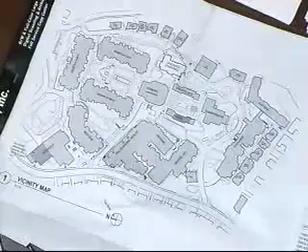So staff had asked, what will become of Building D? What's going in there? We provided a list of the various uses that will be moved into Building D—sort of playing musical uses here. In the end, staff said, if you're going to be modifying the interior of Building D, we'd like to know right now how that's going to go. We think Building D, once renovated, will require its own amendment to the existing conditional use permit, so why not seek those two approvals simultaneously? After discussing that with our client, we decided that was a pretty good idea.

So Mr. Kilburn went back to the drawing board and did the work necessary to bring Building D forward to you for conceptual review, so it'll essentially catch up in the process with the Life Center. At the same time, he worked on some planning and other departmental requests related to the design of the project, which he can discuss with you, and he also worked on responding to the concerns raised at your October 4th meeting. So we're coming back with revisions driven in part by the need to get Building D in front of you before we can go to the Planning Commission, but also, since we're here, taking the opportunity to address the concerns raised previously. Thank you.

You're on—that was a great prologue, I guess. Would you like to start with Building D, since that's kind of the new project? What sheet do you think? Let's see. Cool. What's 5-1 down here, or 5-4?

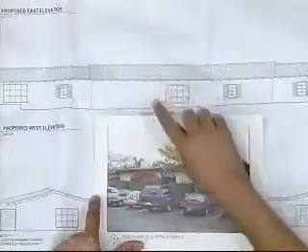And actually, you have 2 chimneys that are not shown in elevation. That's a minor observation - we're not changing those.

I also brought some modeling of it if you wanted to see it. I don't think we need to see it - if we have any questions, we'll come back to this.

So that's all you're doing to Building D? That's correct. Good, let's go over the main Life Center building.

I'm not sure where best to look at the changes, but maybe a combination of the building elevations and the renderings, and also the plaza plan in the front, the entry approaching the building. Yeah, we could look at that first.

I think it's a good place to start that covers several of the comments from our last meeting. At the entry, the lower entry, we had more of a rigid, stepped plan view of the entry walkway. On the upper entry, we had more of this organic, flowing landscape feel that played off of an existing oak tree and the existing fountain.

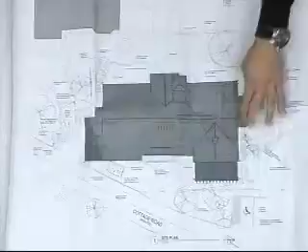A couple other minor changes that I'm not sure affect the exterior, but we had to move some walls around in the mechanical area to protect some trees. Essentially, that's the lower entry change.

The upper area, we were also asked to take a look at perhaps some architectural changes that would help soften the plaza area. What we've done is take a closer look at this. We had a nice curving stair that comes up into the building, which we really like and think leads people into the main entry. But we also had kind of a sea of pavers that felt maybe a little too harsh, so we've added larger landscape areas to break up the space and also lead into the building.

On this side, we had a wall which we've now turned into a seat wall that we think is a nice benefit, allowing residents to sit here and interact with this plaza where we're going to have an open dining area. Okay, now how about we look at the elevations?

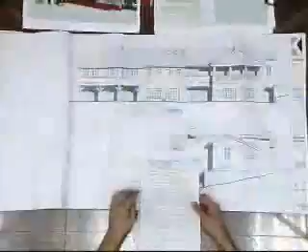East elevation, we had two comments having to do with the detailing here and there. We took a look at your suggestions and felt they were well taken, things we needed to look at anyway as we progressed. One question was to take a look at the width and size of the columns, and make sure the proportions felt right.

We looked at that more carefully and actually widened the columns so they have a larger mass. We were also asked to look at how far out the building cantilevers and how far recessed the doors are, and we decided we needed to pull them forward. So we moved the lower level plan toward us on this elevation by about 1.5 feet, and increased the size of the columns from 18 inches square before to 2 feet, which has a nicer proportion now.

Secondly, on the east side, we were asked to simplify the ornate handrails, look at the lights on each column, and elaborate the trellis. We looked at this carefully too, and the only thing we did was remove the lights on the columns. They seemed a little unnecessary, particularly on the outside of the column, which we really don't need.

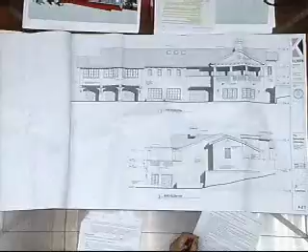But other than that, we felt this area is where we really want to celebrate the space, since this is where the residents are going to spend a lot of time. We want them to have the feel that it's a handcrafted space, with detail and ornamentation for them to touch and feel. I think if you look at the renderings, just removing the lights did a lot, and we want to celebrate the detail at this one location. Okay, let's move on to the other elevation.

Now this area, the main upper level entry - as you'll recall, we had a larger gable and an archway offset from the main doors, with a chimney element for the elevator penthouse. We went back and looked at this and felt that making a more symmetrical entry seemed to make a lot of sense.

So what we did was incorporate the entry into its own architectural element. We raised the ceiling height, added glass around the doors and a transom light, and turned the elevator tower into an actual little tower element. So it is asymmetrical overall, but we feel it's balanced with the entryway being symmetrical.

And then the mechanical well - what kind of changes happened there? After making all those other changes, which we felt were the most architecturally important - the main entries, the areas people are really going to see - we came back to this element and tried several different things, including pulling it out and trying to turn it into part of the building as was suggested.

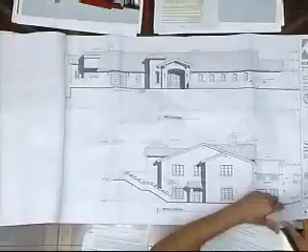One last thing, we were asked to take a look at this element here. Previously it was only seen on the model. There wasn't much change, but we wanted to emphasize the design will be a wood beam sitting on top of this column with open rafter tails on top of it. So that's changed. Let me see if there are any others - these are sections, reflected ceiling plan, okay.

Let's move on to the landscape site area. I want to maybe quickly go through the model since these are your 3D images - we'll just let you study them for a second. I think you could just take a look at them on your own. I did bring some larger ones if you want to pass them around, if that's easier.

So your landscape plan. Yeah, the replanting. The only changes we've made here are just added planting areas within the plaza and at the entry. Just some small areas that would soften this and direct the residents into the entryway. I didn't take a hard look at what we were planting here since the plans were slightly changed. Someone else will. And that was really it, and just the change in the kind of shape of the walkway.

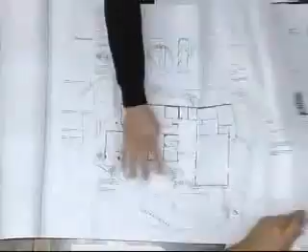This walkway right here. Anything else for your presentation? I think that covers everything.

Great. Well, I'll open up public comment. Is there anyone from the public wishing to speak on this item? Seeing nobody, does staff have any comments? Are there any letters? No? Amazing. I'll close public comment and return it back to the board for questions of the applicant.

I had one quick question. It seems like where the front door would be and these two islands aren't lined up. Is there a particular reason? Was there a tree here that we're saving? Or is this lining up with hardscape elsewhere in the building? Or did you not want it to line up intentionally? Yeah, we intentionally didn't want it to be this straight shot. We wanted it to feel a little more meandering, but still lead you into the entry.

Okay. That was my question.

Someone jump in whenever they're ready. Mr. Chair, I have a question. What sheet number are you looking at? Actually, if we can go to the renderings. Let's go with those bigger ones. 8.1, or I would use these.

I had a question on one of these. I just saw it, so bear with me for a second.

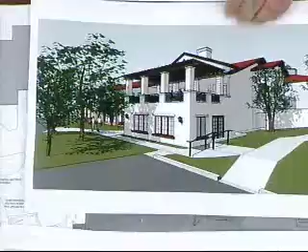Yeah, I think if we look at it in plan, the depth's the same, and then actually this gabled wall is going to hang down, and inside there it'll be a cathedral ceiling with open beams. And these are intended to be plaster?

Yes. Okay. And I had one more question, if we can go to the site plan, which you're on. It says here the existing utility area to be relocated. Is this required utility for this building, and do you know where it's going? I don't know if it's for that building necessarily, and at this point we don't know exactly where it's going either, but not there.

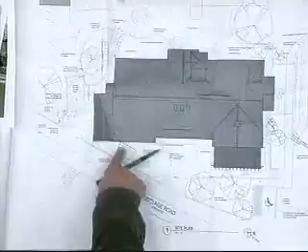That dovetails into my next question, which was about trash and recycling. This seems like a potentially inopportune place to have that in terms of servicing it. So I was just wondering if this were to stay and some trash enclosure be designed or something. This is pretty close to the building here, though. But this seems, in order to service this, somebody's got to wheel something all the way to a road. Yeah, I don't even know where. I can explain it to you, or I can explain the thought behind it.

This is their main dining hall, and it's at the same grade as this. So their main kitchen is here. This is going to be a secondary kitchen and dining area. So we wanted to have the connection between here and here pretty straightforward. They're going to come in through the back of the house, which is the kitchen area right here. Their main pickup area is right here off a loading dock. So this is all at the same grade if they wheel the trash and recycling to here.

That's the concept, and that's how our client wanted to operate. This is a dining hall, and the restaurant's in here. This is a secondary restaurant for the activities happening in this building, for residence use in general, plus a cafe. This mechanical well is for the kitchen equipment in this building. There's also a kitchen and dining hall in this facility, so they might be making stuff there and wheeling it over, or making it here. That's correct.

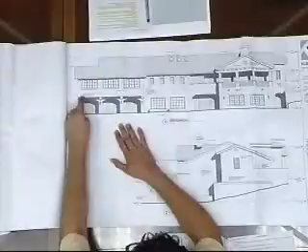I had one question on the elevations, and it's a minor thing. I guess I was wondering if this is the floor plan, if some of this was a furred down soffit, and if there was an opportunity to make an arch in between each one of these corbels, or is the floor joist at that level?

I think at this time there wouldn't be much room to do that. I think the structure is going to fill up most of that, plus mechanical. I think also, just in my opinion, having an arch here is nice. If you see this in elevation from the other end, I think it's going to have a nice architectural feature, and doing a double arch I think might be overkill there. Okay, good comments?

I just have a few short comments from the perspective of the landscape plan. Actually, can I have that little rendering there? I believe I was the one who mentioned possibly adding the seat wall here, and what I was thinking is that this, to me, looked pretty stark, and I like that you've broken it up with additional planters. And I still think we run into a bit of the same problem in that we have this hard surface up to another hard surface, and it seems very stark to me. So I guess what I'm wondering is, I know you need that wall because it slopes down behind that, right? Just wondering if there's any way to bring in even a slight planter just to soften that where those two meet, or even a vine pocket to get something trained up on there.

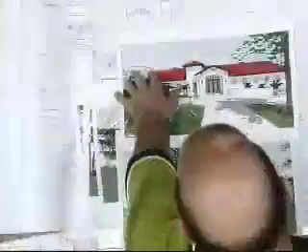Looking at the plans and their use, not future use, but current use right now, I just don't see it. The cooling towers are going down below in the well, so it's not going to be used for a cooling tower or for refrigeration equipment. It may be used for some ventilation equipment, but that's typically fairly small. I think this particular element can be reduced or incorporated more into the space that's there, and it would make this outdoor area a little more attractive.

So I'm still not really that pleased with that element. The other ones, the thickening of the columns, I think are great, and the rest of it is great. On Building D, the only comment I would have had...

There's the new archway opening right here, with a little seated bench in this area. The only thing that would concern me is whether this is too dark, or if I'm worried about these little pockets in here, that it's not opened up. So that would be the only slight concern.

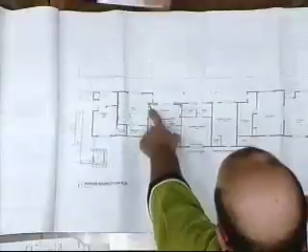Does it have glass in that window? There's glass, and then there's an open archway. So this is glass, and this is an open archway over here. Right here, this is an open archway. Is that a concern? No, okay, that's a comment. That's good. And just so you know, this is meant to be like a little art niche, not a bench exactly.

Can I just ask a quick question? I was looking at the shape of this bed, wondering about this little tower element for the elevator that appears to jut out. Is this accurate? The drawing isn't showing the more accurate plan. Would this be the full plan with green in front of it? Yes, it actually bumps out, so there should have been some walls shown here. I see, okay, just wanted to clarify that.

Clay? Thank you, Mr. Chair. I have a couple comments. I agree with Gary on this mechanical tower. I was looking at the old drawings here from the last submittal, and the details changed around the top of it, but the size and mass of it still seems to be pretty consistent. So I'd be really interested to see how we can make that go away.

It's really the only part of this project that I'm struggling with at the moment. I think the changes you've made have been great, and it's definitely improved the building. The only other comment I had was, and we can look at the site plan here, the renderings and drawings tend to show this is kind of a nice area.

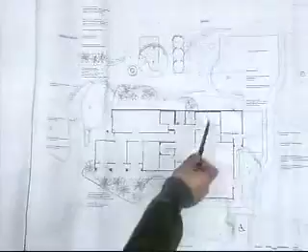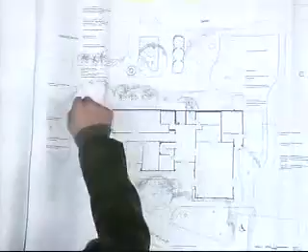The questions I brought up about the trash enclosure is where I'm having some trouble with this one area, because it seems like this is planned for people to have outdoor seating, eating, reading, or leisure activity, yet we're going to have people wheeling restaurant trash, which is usually not pleasant, through this really nice area to the trash enclosure. So I was looking at whether there's an alternative path, whether this can be shifted somewhere else. I know we've got this big oak tree here, but I'm concerned about the functionality of this being here with the loading over there and this sort of triangle through the nice public outdoor space.

You can respond the next time you're in front of us, we're in comments right now. So my comment would be, well, I just don't think we explained the use that well. That's not what's going to happen, but okay, another time. All right.

My comment would be to consider the location of this trash enclosure and the functionality between the existing dining, the new dining, and this location. Okay, anything else? Nope, great.

I'm definitely going to echo the comment about the mechanical well. What I sense is that the cornice detail needs to step in instead of stepping out. It needs to be reduced in size dramatically - find out what equipment you need and make it only for that size. Also, I don't think you need this roof in front of here, because if these two walls are in the same plane, this can be one element, which makes it look even worse as a bookend. So you've got your job to do as an architect to come up with a better solution. I don't think we're going to back down on that one.

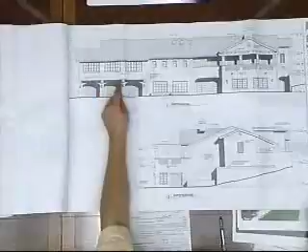Mild comment on the elevation, this is just what my eye sees. I would suggest studying putting 3 little separate arches just below these arches and see what it looks like. If you don't like it, you don't like it. But somehow this hard edge and this soft edge are in conflict with one another. If you have the spring line from here to here, it looks maybe 6 to 9 inches. So if you can pull that down, raise that up, or pull these down, you might have a softer look. It's all just foo-foo. I just think it's something that can be studied. Those were the only comments I had that were different from other people.

So at this point, are you still going to go on to Planning Commission?

Okay, so what I'd like to suggest before we make a motion is that we carry forward the first 2 items of the previous minutes. The first item was the compatibility analysis, items A through F. Item 2 was that the project mass, bulk, and scale is appropriate for the site. And then anything else we want to add is from that point forward. So we need to tack on a statement about building D. Is someone in a position to make a motion?

Do you want me to craft a motion and see if it flies? All right. Yeah, okay, so the first...

This would be item 3: the applicant is to redesign the mechanical well for the kitchen at the Life Center building. The applicant is to provide additional information about the CMU block walls outside the back of the kitchen, which is used for cooling, to hide the cooling equipment. And the applicant is to continue working on the front plaza area, in particular the landscaping adjacent to the front wall. Should I say additional information about the seating wall? No, okay, leave off the seating wall part.

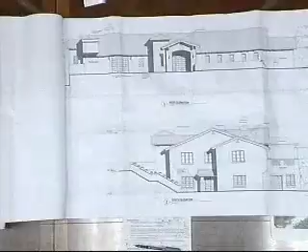Anything else? With that, I'll call for a vote. All in favor? Aye. Opposed? Motion carries unanimously. It's an indefinite continuance on to Planning Commission.

Great, thank you very much. Good luck and have fun. Thanks a lot.

You want some of the old drawings back, or you? Nope. All right.

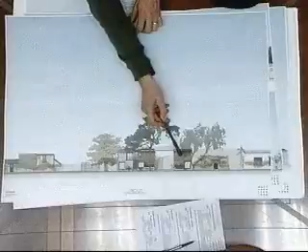So that was restudied to carry the same proportioned windows that are on the portion that was favored. The other thing that was studied was the materials a bit more. We spoke about whether the window fenestration would be painted or stained wood, and now it's shown as a stained Douglas fir in order to give it a sense of more warmth. The other component mentioned in your notes is the sense of entry with the bridge.

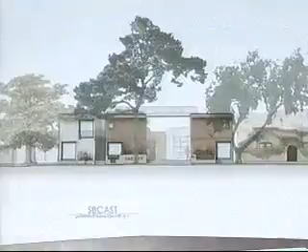That's been maintained very much because after going back and exploring it more, we really did like the notion that there was something one passed through and entered into. We can go into plan, and I can point out some of the other points that were brought up.

So if we flip the page, a few pages. Let's just quietly go through each one of the pages so we know what's on each sheet, and then we'll get to the plan. The one difference is that at the back of all the other sets, you'll see there's the actual hard line drawings, and then these are just the colored ones. So we'll just go through the colored pages. Street elevation, just giving you context. Yeah, you get to see it across the scale of the street. Exactly.

And this is looking at the north property line. You'll see that we're showing the gridded fence, which is like a black metal rectangular or square grid facing our adjacent neighbor.

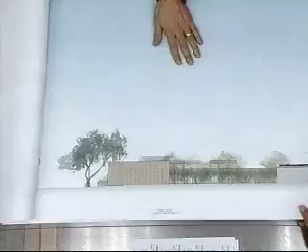One of the things we've done is shown a potential gate in the center of it, because in our conversations with that neighbor, we've found that she would like to be able to participate with us when we have events happening. So the idea is to have the potential to open up our gate between them, and we're showing landscaping along this gate, but not creating anything to obscure the view between the two sites, to keep it as open as possible.

This line here is the approximate profile of the existing building on that side, since that building actually has an angled top to it.

Now looking facing south, one of the other comments was to break up the facade of the building to have some variation along it. So you'll see these two wells, the slices that run through it, giving more delineation. This was enabled because the stairs, which correspond to those two locations in plan, used to come right up to the wall with the cistern, the water collection cisterns, on the inside. Now they've been placed on the outside and the wall pushed back in order to get that relief.

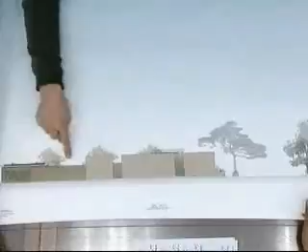The other thing, which maybe shows best here at the tail end of the site, is the metal gridded fence, but within it are wood slats in order to create more privacy along those property lines, and then also planting at the rear where that back garden is. The intention simply is that we don't know who our neighbor will be over time.

We know that someday there's a flag-shaped lot adjacent to us, and someday they'll develop it. When that happens, perhaps we will then treat this differently. But in the interim, until that happens, we are pretty much creating a visual barrier between us and that site.

This is the interior elevation, again looking towards the south property line, so you see that same wooden fence, and this is where those water cisterns and the stairs are.

And then something else I want to point out is the green wall. As you come in from the street, you pass through the first buildings at the front, and then there's the green wall, which corresponds with the bridge that's overhead. That bridge is set back significantly from the edge of the street, and it signifies part of that entry sequence as you come into the site.

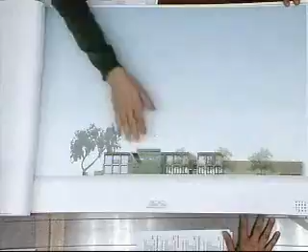What's the height on that fence? Good question - that's going to be 10 feet. And that would be the same on the opposite side as well? Yes, I can go check in the set to verify that.

So then that's inside looking north, and that's the gate that you made reference to.

And now we're at the plan, so that may help. There aren't significant changes in the plan in terms of the configuration of the buildings and everything. What you'd see mainly is a little more detail about the planting, and I'll let David explain that more afterwards.

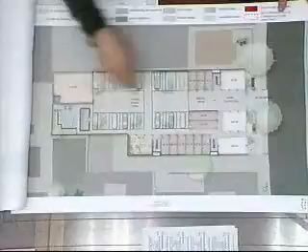I think the main thing to note is, as you come in, here's where that green wall is, facing south as you come in on that entrance sequence. Farther back there's a visual connection around the recycling location, which has also been covered with green wall, so when you look in you're not looking at a structure so much as green and planting.

The area in back behind it is meant to be a private garden space and a quiet zone, with plantings around it. One of the comments made by the board was about perhaps making that more of a focal element, but after studying it the choice was to create a green wall and a quiet zone, to give different experiences for the people who will be here on site.

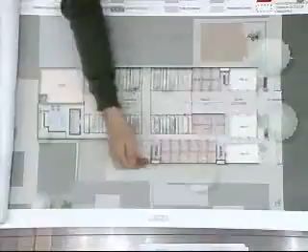Here you can see in plan again where the cisterns are now on the outside, and the wall has been stepped in order to create more variation. And the second floor plan...

The issue about the light studies regarding that unit over here - there was a concern about that, about its views out. Although it doesn't show in this plan, I'll have to show you in the elevation. That was that green wall elevation.

Yeah, but in that green wall there are windows. So there are windows in that elevation in order to bring light in and to have some view out. There will also probably be skylights put in that unit as well. We studied the possibilities of moving the units around, but we have so little space, and it was determined that the feeling of having the kind of organization that was already established made more sense.

Anyway, that unit has that light established, and this one would then get an additional skylight, which probably didn't show—skylights underneath the solar panels. Yeah, that needs to be picked up. There's a coordination hiccup. There would be a skylight in there.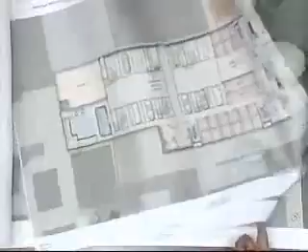Then the other thing we wanted to show is we took to heart another study. There was a concern about having a separate pedestrian entrance coming from the street, so we took a look at that. This is a very small image, but I'll put it out. The idea really was to go back to more of a European precedent. These two are examples where the pedestrian entrance and the vehicular entrance basically share the same courtyard.

It really is felt that's how this site is going to be used. This really is the entrance—we'll have that as a main means of convenience, but truthfully, when people come here, this is really the main entrance, and it will be celebrated and operated that way. There are physical reasons for doing this too, since all the landscape at the front of this zone would get eaten up if we have to put in a ramp.

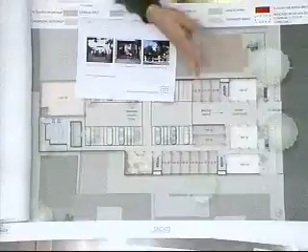So we didn't feel it served the project best to have two separate means of entrance. Going back to that—how has ADA been addressed? Well, ADA is handled: the slope running through here does handle ADA, so one can roll in, and there's also ADA parking on site adjacent to that unit. So our point of view is that ADA is addressed.

And then the other thing is we also took to heart some points that you made, so we've done a study you might find interesting—what would happen if we kept the same number of units and tried to address the issue of the adjacent neighbor, where you were concerned that the height of this building was perhaps impinging on the height of that one, or maybe not in context.

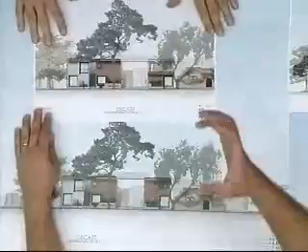So I'm going to go back to the elevation page and we'll take a look at that. Here's the elevation of our primary scheme, and here's an alternative. In this alternative, what we're showing is... just don't move it once you have it, because the TV camera kind of zooms in on it. That's okay, that's fine.

So what you'll see is, instead of this being—in the primary proposal this is a 2-story building, roughly 20 feet, not quite even, more like 17 feet when you add it all up—the alternative would be to have a 1-story building at the foreground, have it step back, and then have a roofscape there.

I've got a plan to put next to it, you can put that over it if you want. Well, it might be—I guess if people want to see it online, this sort of gives you the idea. So here you have a unit at the second floor and back, but it's probably better to look at this one: here's the unit at the second floor and back.

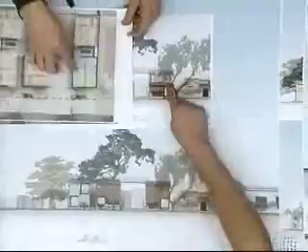Is this the version we're looking at right now? Correct. This is roof in the front, unit towards the back, which represents that building. Then at the third level, back here, we would add another unit. So right now we have a 2-story scheme. Essentially we're taking the unit that was here up to the front and stacking it at the back of the building on the third level—that's it right here. For your TV camera, that would be the third floor, one unit up there.

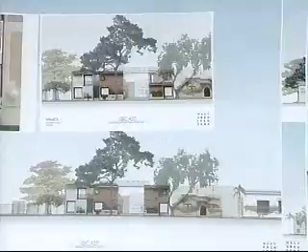And so the outdoor living space that was there is now located there. Precisely. So we're mainly offering this as a point of discussion to show that we studied and took a look at it, and we're interested in everyone's comments. Well, thank you very much. David? Landscaping?

I think after looking at Barry's site plan, you're familiar with where the landscape areas are. The plan shown today is pretty consistent with what we showed last week.

Our design approach has always been to use native material wherever possible, to conserve water and be consistent with the environmental approach to the building architecture and the project itself.

So what we're showing out front here is not unlike what we showed before. We've got the 2 elm trees that are existing street trees, and then a grass palette of material: Leymus Canyon Prince here, Berkeley sedge grasses in the front, some agaves here, and then native deer grass, which gets about 4 feet high or so.

And then as you move in, we're still proposing to use the desert willow. It can get 15 or 20 feet. We planted them in the opportunities presented here in terms of these finger planters. We feel like they'll give us good cover, and the space itself will have nice enclosure.

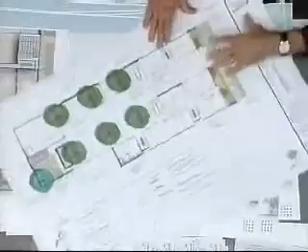We have the native California... morning glory, sorry, it escaped me. Morning glory on the fencing here.

This is the steel fence, and then the horizontal board fence, if you will, right around the passive area here.

Under the trees and these finger planters, we've got reed grass, and some minor plantings. Oh, and I should point out too, this is the green wall, and under the green wall here, and on the ground plane where the fencing exists, not necessarily here, but along here, and around the trash enclosure with the green wall.

I wanted to use some sort of inert organic material there. So what we're proposing, because it doesn't use much water or any, is a native sandstone cobblestone as a ground cover up against the fence, which I thought would be a nice counterpoint to the more industrial look of the building itself.

And then we've got some minor little planters around the stairways, and since it's pretty shady in there, we're proposing native coral bells. In the back, we're using a small oak that we don't use very often, the Engelmann oak. It's smaller and I think a more appropriate scale for this, and the understory would be Winifred Gilman salvia, all native. So it's a very clean, broad-stroked approach to the landscape palette.

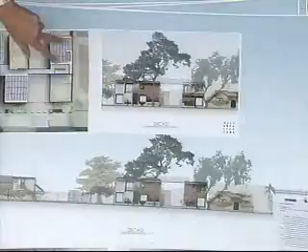And the whole side of this building, there are large windows, and then we have a fence here. Having 2 stories on both of these parcels, I believe will turn that side of our building into a very dark place. So I would hope that you would consider having them move that unit. I think having a 3rd unit on that end will give that area, that neighborhood, a sense of variation, take away a lot of the flat roofness that is here and there along that street, and give an opportunity to have some tower-like space with a bit of a view.

So I'm very enthusiastic. I love the front landscaping, and I just wanted to mention, while Mr. Black is here, that the property line from the back of the office across our parking lot to our warehouse has mature tipu trees and a beautiful mature tobira hedge and these bell, tulip-like vines. Planting a fence with morning glories is obviously wonderful for one side, but on the other side we may have a little invasion process going on between mine and yours. So we'll have to look at it. Okay, good, thank you very much.

I think that's it. Are there any other speakers? If not, are there any letters that came in?

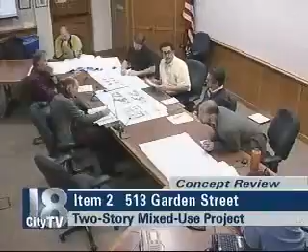We had that letter that Gloria forwarded to y'all by email this morning, a letter in support from Nina Dunbar, who is the executive director of the Arts Fund. Okay, so I hope you all got that and had a chance to read it. We got it, and I read it.

Thank you. So we'll return it back to the board for questions of the applicant. I don't have any questions. Does anybody else have any questions? I have a couple questions. You're up.

Let's go ahead and throw the landscape plan up here, I guess. My question here is, what is this width, and what's the required width you have there for that entry? Yeah, I'll tell you, 20 feet. Exactly, 20, okay. I guess that'll kind of lead into a comment, possibly, is there a possibility to add additional planters? Is this the only spot that could happen?

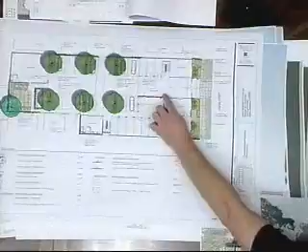Are these sliding doors here? I mean, what I'm seeing is glass on this side. It's all glass here, facing each other. So this is really the only blank wall. Correct. Do you see any problem with adding additional depth here for a planter, so that as you look in, it's a little more green? Or is there a reason you left it sort of back and open, you just want that feeling of openness?

Well, I think for fire department access we pretty much need to maintain that. You need 20 feet? Well, yeah, I guess. I mean, I'd have to go research that. Yeah, okay, something to study. I'm just trying to get as much green in here as we can, I think, and I think David's done a good job here. So I'll leave that up to your research.

Another question I had was regarding the cisterns that are now on the outside. I'm wondering what that material is, or do you know yet? Yeah, we've done research on it, but we haven't made any determination. Right, so obviously it'll be something somewhat aesthetically pleasing, not like plastic. Yeah, it's not just a monster. Yeah, exactly, and it may turn out that it's actually a plastic green monster that's covered by something else that you see. Okay, I mean it'll have some treatment if it isn't something aesthetically pleasing.

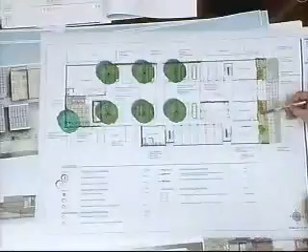Okay, and then one other question was this area right here. Is this a slider also? So you need access, this must be hardscape. Correct, that is a slider, it mirrors this one and is similar to that. Which is what gives you, if you look at that elevation right there, that checkerboard effect.

Got it, okay great. And then the final question was this trash area. Is that basically a roofed storage unit with a green fence on it with vines, or is that an open space? It's open, it's open to the sky. It was not a storage unit, but it is fencing with, basically green wall construction is the idea, that it would be a live wall. Okay, so just a fence with vines, basically. Well, it might be a green wall, which is a different structural consideration than a fence, per se. It's much more dense. Basically, imagine it as topiary.

All right, that's my questions. Questions from anybody else? Mr. Chair? Keith, Barry, I assume that the colors that are represented here are kind of a representative of the direction that you guys are going with materials, or...

I'd like to say there may be a little bit of artistic license on my part. I think it gives a flavor of where it's going, but I wouldn't want to hold up Pantone colors to it. It's indicative of the direction. It's meant to have an earthen warmth to it.

I had one question I forgot about. Not that it's a concern, but there's an existing tree on the property. Does that have to go through the street tree committee since it's within the first 20 feet? Has that been done? And would they require you to replace it with a certain number of trees, or since you're doing trees in the parking lot, would they see that as equivalent? Probably—it's not a native, it's pine I think. We did raise that originally during the PRT process, and it was not identified as an important tree or a contentious issue.

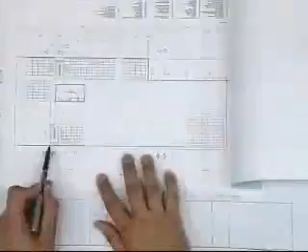Can you show what sheet that is? That's the 2.3 alternate. What I'm looking at is this solid wall—would that railing go to this point? Yeah, exactly, and you'll see that's 24 feet. On both the southeast and northwest elevations, on both the alternative and the proposed, there's no fenestration on either side—the only proposal is the inset of the wells. Is that correct? That is correct.

Any other questions? If not, let's jump to comments. Who would like to go first?

Mr. Chair, I still like this project. I think the changes made to the street elevation are definitely an improvement from before, and I'm curious to see what comes of it as this develops further. I like the project, I like the direction. I think the changes to the south elevation work well.

I might be interested in seeing some way of breaking up... maybe go to the south elevation. Which one did you mean—the same one Gary was asking about, with the east elevation? It would be this one, with the sandstones. Yeah, that's fine.

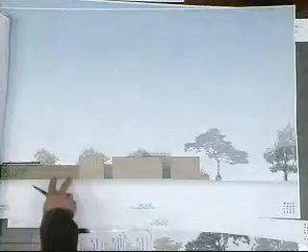I was wondering if maybe there were opportunities to break it up so it didn't look like a mass wall, that maybe it had some sections without any siding, so you had a little bit of transparency through there with some vegetation. It might be an interesting idea.

For me, I wanted to look at this because I understand the neighbor's comments, and I was looking at the site plan. I feel that this is much less successful as an elevation when you take that front unit off. But I was looking at the site plan, if we can go to that.

We have, is that? There you go, that's fine. No, that was a good one. Is that the upper level? Well, this was the upper level. If that's what he wants to look at, it doesn't really matter, okay.

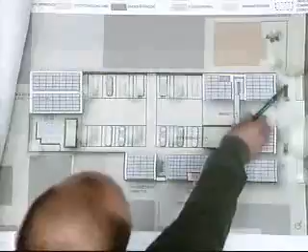One of the things I noticed is that north is this way. So as the sun rises, we all know, it rises over here and kind of comes around like this. So the most sun exposure this building's going to receive is going to be here, and then around like this in the afternoon is when it starts to drop down.

So as I look at this, I think, well, if you're going to take a unit out, it probably wants to be here as opposed to here, which would keep the nice facade along the street and the balance that's there, but also maintain the light for that building. And in saying that, I'm also not that excited about just shoving another unit up on top of here either.

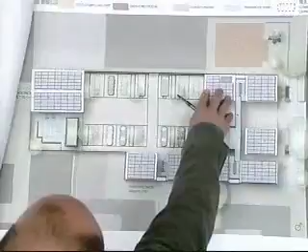So I guess my direction would be, if we're going to look at taking one of these units out, I think it should be the rear one, because it would probably have the most benefit on this structure. But again, I'm not that excited about that third-story piece here and just the functionality, and what it actually does to the mass of the building. It's hard to see in this design, but to the actual mass of the building.

But in general, I'm very supportive of the project. I think it's really nice and I'm excited to see it happen.

Anybody else? Any order? Keith. Look at the site plan.

I echo Clay's comments. I think this is really going to be a great project, and I'm supportive of it. I think regarding the massing, I would tend to go with the original scheme of the 2 stories at the street. I think that's more successful architecturally than having the 3rd story kind of isolated somewhere.

The adjacent structure, although I'm sympathetic with the neighbors' concerns, it is a commercial building. We're talking a height difference here of, when you consider the pitched roof of the neighbor, about half a story. So I think in a commercial zone, that kind of variation is justified, and really you want to have that kind of variation in the streetscape. So that's kind of my vote on that.

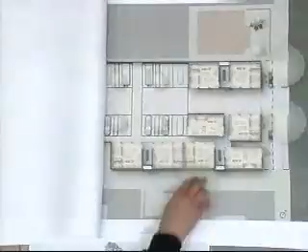I agree with Clay. I think the next iteration of the street facade is more successful than we saw last time. I'm still not totally convinced about the windows for this unit here - I forget the number, it's either 205 or 208 - but this guy's really looking at a blank wall for the most part. So I think if you introduce this idea of a skylight at the back, it should be a pretty substantial one, because he's pretty much in a light well.

It's 205. Okay. But yeah, I think it's definitely progressing nicely. I would like to see a more detailed study of the paving throughout the project, just because it is such a dominant element, and with an eye to getting as much green in there, and what the materials are and everything on that. So I think that's it.

Yeah, either one of you.

I do like the project, but I do have several concerns still. And I think one of the main concerns that I have is the southeast elevation and the west elevation, particularly this unit and this unit here.

Let's see, I'm kind of looking at different plans here. Let's go back to these, if you don't mind, those CAD ones. That's fine. Thank you.

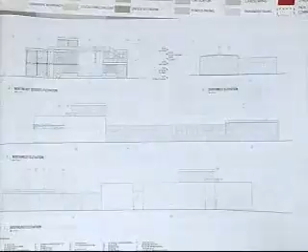When we look at these corners right here and how blank and harsh they are next to the existing building that's there, it's not very human scale. You come up to it, it's one element of materiality, and it's a very harsh corner that you'll be seeing in both directions when you're driving down. I think that element, if it was a regular building we were having, we would say it needs something. I think in these particular instances, fenestration is needed.

The next thing I want to talk about is the fence. Can I share a code thing? You can wait till after I'm done. The next thing I want to talk about is the fence.

And I think the fence - I just think it's too tall. And when you have an opening, let's see if we go to the site plan. If you want to say it's this one. Okay, thank you. Is that it?

I was hoping to have the neighboring property - but in the neighboring property right here, on both sides, it's open, and one of the comments you made was that you were going to open up a fence in between it, that gate right here. What we have is a section right here that's open, and some openness on this side. But what we put up is this big 10-foot wall, and I really feel like it's enclosing the entire place. I think the height of it is not human scale at all, especially if you have the idea of having interactions and things going on in this area for the public. I feel like this area should drop down in height and be more inviting and more human scale.

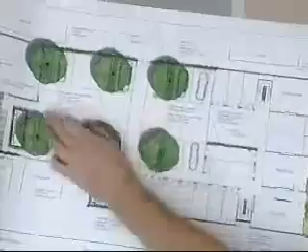Maybe I'm missing something, but it seems like there could be more planting as you look down this big corridor here, and this seems like an opportunity, at least to get maybe a 2 or 3 foot bed in there. I don't know what the fire department requirements will be, but again, just to green up as much as we can in little pockets here and there, because basically you look straight down this to the corner of a building, and these trees might overhang a little bit. You're not going to see much planting at all as you look right straight down this corridor.

Also, Keith had mentioned this trash and recycling area. I know you want to keep it as kind of a quiet area, but I think this could at least open up a little bit here so that it's not such a pinched point. I was looking at, could the trash go here with a green wall instead, so you're already closer. But again, you want to create that privacy back there, which is understandable, as long as you're not smelling it too much.

So beyond that, I agree with what the rest of the board has said. I'll leave my comments at that.

Okay, thank you. Well, first of all, I want to say thank you very much for studying the option, because I was the only one who dissented. And I strongly believe that we should do something here at the second floor and move this back, and I appreciate that design scheme. I actually went to their business and I stood in their courtyard and I actually took a photograph looking this direction, and I imagined what it would be like to have a 2-story element right here. And I understand that this is commercial, but I also recognize the fact that this is an existing building.

It is here, and we need to work with the existing infrastructure. I don't have a concern like on this side, like Gary says, because eventually some building's going to come here. But while it's not there, you get to hold this corner. But on this side, there needs to be some harmonious relationship. There just can't be you're there and I'm here, and so I appreciate the fact that it moved up here.

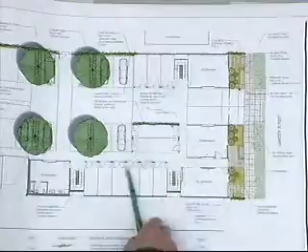Yeah, I think you're depending on what your grade issues are. The other thing related to ADA, I think this will probably come up in plan check, but these probably need to be over here, the ADA parking, because of their proximity to the unit. So I would just do a little site planning once-over with the ADA and make sure you got those covered.

I had one comment under discussion for the bridge. I don't think we should do a straw poll because we're missing 2 members, but I personally don't have a problem with the bridge, and if I'm hearing right, only one person had a problem with it. Just so you know going forward, at least the majority of people here were fine with the bridge elements. I was wondering, do you want to put something in the minutes or the motion about that, or no need?

Let's go ahead and, to simplify Clay's comments, study the incorporation of a separate ADA pedestrian access. And then that the board is, overall, comfortable with the bridge element. Be the last comment. Yeah.

Anything else for the motion? If not, I'll call for a vote. All in favor? Aye. Opposed? I'm actually going to be opposed just because I'm going to hold out just for one story in the front. That's the only way I'll support the project. So with that, there's 4-1.

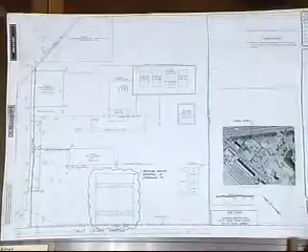It's a 900 square foot office building, right there, and it has above ground fuel tanks in the back. There is some fencing to separate the yard from the retail area, and there are existing underground fuel tanks also shown on your site plan, out in front. The site is neighbored in an area of heavily industrial parcels around it.

This is a project where we're proposing to add a canopy, a metal service station canopy. Elevations are included on the second page. It's 53 feet wide, as you approach the fuel islands, not from the street view, by 42 feet long. The 42 foot would be along Calle Cesar Chavez.

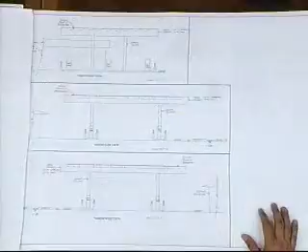It would be a metal structure with 10-inch square steel columns, 4 of them, and the top would be metal panels, a traditional gas station canopy. The solar panels would be recessed within the metal facade of the canopy. The structure is supported by purlins and beams above a metal deck, so when you're standing underneath it and look up, you see the metal deck as in a normal gas station canopy.

They'll have lights, fully recessed lights. The metal panels will be up top, as will the superstructure, so they won't be visible to the public.

Okay, let's see what's on this sheet. Canopy, drainage, and the lighting. This is the recessed lights. Yes, the lighting's fully recessed, and it's LED technology, so it'll be energy efficient.

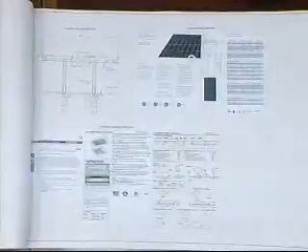The goal of the project is twofold. Number one is to keep rainwater from turning into tainted stormwater. Of course, in a normal fuel station, rainwater is captured by the canopy and carried through gutters and downspouts out beyond the canopy. In this case, when there's no canopy, it hits the fuel islands. Customers often will, as they're fueling, top off their vehicles, and from time to time fuel is spilled. Although best efforts are made to contain that, once it hits the ground, it can be absorbed into the concrete and the water can draw it back out.

So a canopy is a best practice to keep that from happening. The other goal is to have a platform to contain the solar panels to offset the electrical expenses at the site. Just to quickly go through the colors: this blue is going to be the canopy, this silver gray is the post, and the white is the underside.

Yes, okay. And I think that concludes our presentation.

Is there anybody from the public wishing to speak on this project? Seeing nobody, I'll ask staff, are there any letters? No letters. So I'll return it back to the board for questions of the applicant. Anybody?

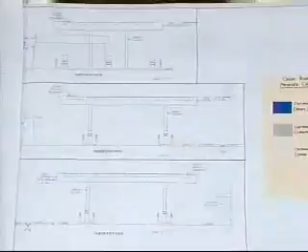Mr. Chair, one quick one. What's the height here, just to the underside? 15 feet. Okay, thank you.

Gary? Just looking at one of your details, I think it's on the last page. It appears that the column has a base on it. Looks like it comes up about 4 feet, 2 feet. What is that base? Is there material around there?

Is that talking about this little bump out that happens right here? No, there isn't a bump out there. It's just the painted metal canopy pole going up. So the column is only going to be the 12 by 12 column, and there's not going to be a skirt or a base, or it's not going to be sided with other material.

Correct. Well, actually, we'll have you maybe get back with additional information, because it definitely shows a little bump here. It shows some material on the outside, a casing around the outside. That's the pump in front of the column. Sorry, maybe for clarity that should be clarified a little bit, because I could see that.

What page are you on, Paul? I'm on the last page. It's clarified on page 2, but go to page 3. Look at this last page, the detail up here. It looks like the columns are cladded. You can see the steel column in the center, and then it's cladded on the outside. There's a little bit of base. It's not that it's a deal breaker or a big deal, I just want to know what it was. All right.

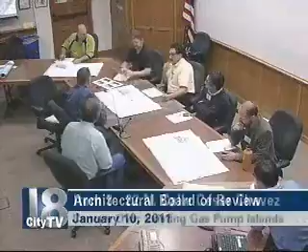Anybody else? I actually concur exactly with where he's going with that. Yeah, I agree as well. I'm a little concerned about the views up to the mountains. I mean, it's a nice big wide open area right now, and it's a very industrial zone, like you said, so there's not much we can say about that. But it would be nice.

It's also very concrete dominated in this area. It looks like you have an asphalt sidewalk here. As a gesture to the city, it'd be nice to incorporate even a strip of landscaping in front there, just so we don't have this entire huge expanse of concrete. We're not going to require that, of course, but just as a recommendation for the city to add some greenery in that zone.

And I think that's it for my comments. Gary? Yeah, a few comments. I do like all the environmental aspects of it - the LED lights, the solar panels, the shielding of the site itself. So those are all positive things.

The only thing I'm concerned with - there are 2 things. One is, of course, the blue strip all the way around. The other is that this is rather a very plain element that we're proposing. Is your mic on? And I think that it deserves a little bit more architecture. I would say that the columns should have plinths on them made out of stone or something that's going to make it a little more upgraded from what it is proposed.

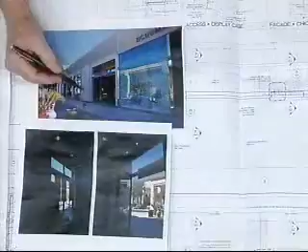In working with the structural engineer, it actually turned out to be a little more than we expected, because we had to tie it to the ground rather than support it off the existing structure, which is a requirement of the storefront design criteria at La Cumbre. With that, we also had wind uplift to deal with, so we ended up adding cables in order to support it, tying it back somewhat to the existing structure beyond.

So with all of that, and also creating drainage for the canopy itself, which came down through the space, we made some modifications to where the storefront related to the canopy, but we could not lower it more than a couple of inches. And that was not presented as an absolute in any event.

Okay, let me find the overall elevation. Was it on this sheet? That's the site plan, it's the next sheet. Okay.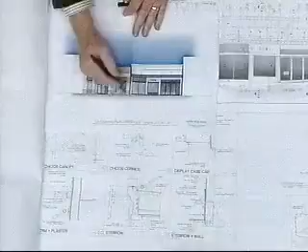Anything else you want to go over? Not really. At one point, I think in these elevations, we show a neutral strip on either side, and I think it's identified as plaster. But there's an existing neutral strip actually in between the Louis Vuitton and the Chico's in this location, and the intent really was to match that. It will in fact be a flat metal strip that allows the cornice to return into that on the ends. It's shown here just as smooth plaster. It could be plaster, but we'll probably want to contrast it in color so that the profile of the cornice up above stands out against that.

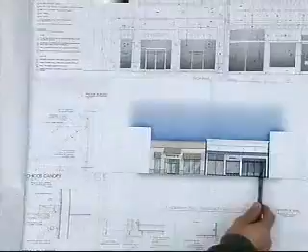It's actually an existing condition. So this is an existing head here, an existing head here? Yes, okay. We didn't alter the storefront — essentially what we did is we put the canopy at this line here, and you can see this storefront is slightly lower than it is out here. So what we were trying to do is keep this intact. In our first presentation, we had suggested something more contemporary, such as what was seen over here, because the client wanted that, but that wasn't received well, and we were told a more traditional approach was preferred, so we left the center glazed storefront in place instead. Rather than replace it, since it's already there, in our last pass we decided to leave the storefront in place below and then just add the canopy up above, right at that line.

So correct me if I'm wrong — this opening is right here. That's correct. And this opening is right here. Right, and this is higher than that? No, that's exactly equal, and that's the bottom of the canopy. Back beyond this, it drops down at the storefront line. This is recessed about 4 feet, so this is actually pushed back. That's all pushed back — that's what I wasn't getting. Yeah, including this piece right here, which is also in the line of the storefront, which is back, so this line is consistent all the way across.

Do you have a reflected ceiling plan of that area that shows where it breaks back? We do, that might show it best. Well, actually, we've got a roof plan in this section. This is the recessed area here, and this is the lower storefront here that you see, and the storefront actually comes up to this line beyond.

Questions from anybody else? Let's go into comments, any comments? No comments, then let's just move on.

I'll give you my thoughts — I think it looks great, I think you did a good job. Ideally we wanted it a little lower, but I can see that it's a problem to do that, and I think the project looks good and it's ready to move forward. Okay. Anybody else? I concur. Cool.

Any final comments? No more comments. A motion.

Mr. Chair, I move for final approval. I'll second. Any other discussion? We'll call for a vote. All in favor? Aye. Opposed? Motion carries. Congratulations, thank you.

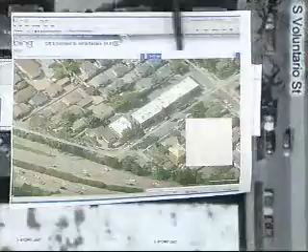So here's the freeway, and then we have South Voluntario, and Indio Muerto is right in this location. So our site is right here. It's a very deep lot, as you can see. This is 50 feet, and I believe this is 200 - I'd have to look at the site plan, over 200.

So what we'd like to do from here is keep the existing house as is. There are some things that need to be removed that we can't find permits for, in this location. We'll create the parking, and then a detached garage in this location, and then just a single story.

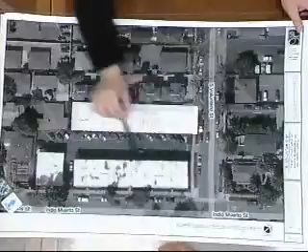And in this area there's a proposed 3rd story, and these are 2 stories. You can see the neighborhood has a kind of massive apartment project, so that 3rd story would be heavily screened, not only by the existing 2 stories. It's about 20 feet tall, flat roof, and then this is all 2-story here, and more 2 stories here and here. So it's pretty dense, the neighborhood.

We didn't want to do 2 stories in this location. Instead, we'd like to propose a 3rd story back here. And here are some of the...

Sorry to interrupt - can I just clarify? Is this a proposal for a new 3-story, or for a new 3rd story on an existing 2-story? I'm sorry, it's a whole new building.

Okay, and you can see here's a 1-story building existing, a 1-story building existing, and then this has a carport in it and some type of storage area back here. So there's no existing building currently on location? Well, this is what's existing. Okay. So, yes, not quite sure on the style of that.

So this kind of gives you an idea of what's happening around the site. There, luckily, even with the vegetation we're going to remove, which is mostly in the center - very large avocados and orange trees - there is Pittosporum along this side that was planted as a hedge, 20 feet in this area, and about 26 feet tall in this area right here. We plan to keep all of that, and there's the same kind of planting along this side.

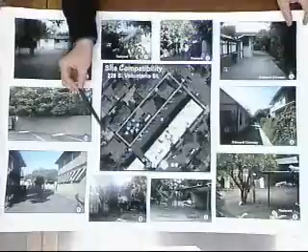You can see that mature vegetation right in this area. This is a picture of it on the opposite side, and here it is again all the way through. So it is a massive hedge, and it can easily be cut down on the side, but it's not really overhanging much because mostly it's the avocado and orange trees taking up the area. So, do you have any questions on that?

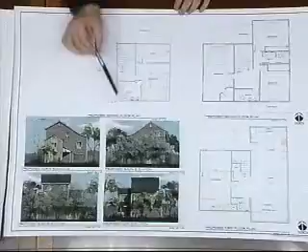This is an interesting neighborhood, and this is going to be a rental product, obviously. There's not a lot of rental products out there for big families, or families that are also taking care of in-laws and things like that. So that's what we're going for, and that's why we proposed the third story.

We tried to make it as easy as possible to build, stacking the bathrooms, and nothing's too lavish. It's the bedrooms - some bedrooms are relatively small.

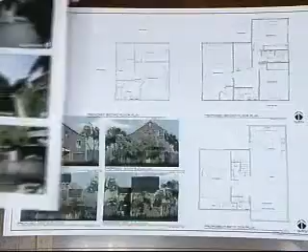You can see the third story would be mostly seen from that one elevation, where you have the existing big blocky buildings, which is this elevation right here.

You can see all that mature growth. I measured this - it's about 20 feet right here, and it goes up past that. And this building is 20 plus feet.

So that's that east elevation, which is right here. We tried to show where that would happen. So is it this line right here that we're looking at that faces that? Yes. This right here is next to that big parking lot.

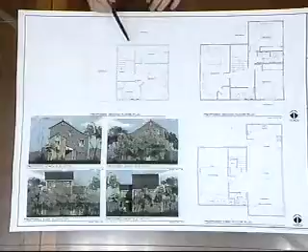And we've got a little entry area that comes in, just a simple downstairs floor plan.

Anything else? 4-bedroom, nice presentation, 2.5 bath.

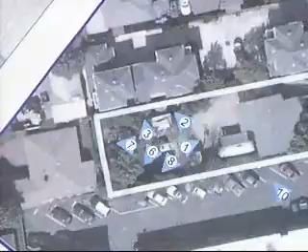No, it's not on grade - it's a second floor patio, a real small one. The vegetation is so dense here that it's hard to see them. It's easier to see what's happening from the other side.

That's the front building, and that's the architectural style of the 3 buildings along that side. But I'd have to probably define the fenestration - I'd probably have to pull the plans.

All right, let's jump to comments. Gary, you're up - here's a better picture. Justin, I think it's a pretty good project.

It's sited right - the 3 stories in the back of the lot, and that's a good place for it. So I don't have a lot of comments.

Some of the comments I'd like to make mostly have to do with fenestration, like on the first floor where the garage is and a little bathroom - maybe to get some light or fenestration in there where the garage would be, on the south elevation, would be nice.

The other thing is, on the third element, where we have such an expansive roof with that broken pitch roof, I think it might be nice to introduce a shed dormer, not only to let some light in there, but to break up all of that roofing material. That would be the only comments I have.

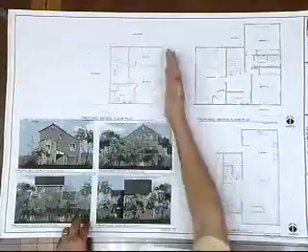Over the bedroom that's over the garage, which is the shed roof, you can volume the ceiling so they won't be pinched by lowering this to 8 feet—it's really just these two rooms. This still can be volume. And then taking this down to 7 foot at the plate, you can fur out these walls a little bit and create really a cool looking ceiling. Anything you can do to bring down the height.

But this is a huge room. I mean, you don't have the dimensions on there, but my goodness gracious, you're going to be 15 by 13 in there and a huge walk-in closet. So you've got ample space, so I'd look for ways of softening it. But other than that, it's a good project.

So we did questions, we did comments, we're now on to a motion. 2-week continuance. Sure, I'll make the motion then. So this would be 2-week continuance back to full board. Actually, I'm sorry, before we do that, I forgot about this part.

Compatibility. I'm just going to read through these things, and we'll go through and make some additional comments. Compatible with the architectural character of the city and the neighborhood, appropriate size, bulk, and scale, sensitivity to landmarks and historical resources, public views, oceans and mountains, use of open space and landscaping. Based upon these couple of items, does anybody want to chime in with some additional comments about this project?

Mr. Chair, if I might, kind of a sidebar here, I think I'd be more comfortable making the compatibility findings after the next iteration where we kind of fill in the missing pieces. Does the rest of the board kind of agree with that? Sure. Yeah, you're very close. So get back to the motion.